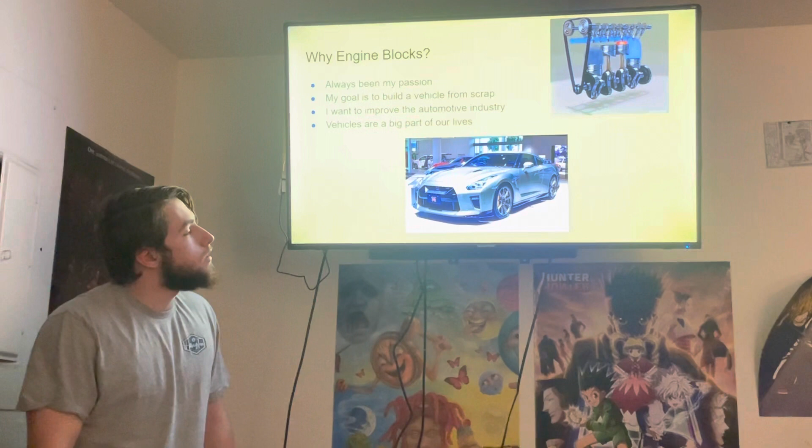So to begin with, why engine blocks? It's always been one of my passions. Ever since I was little, I've always loved vehicles. This is one of my dream cars, a GTR 35, it's a Nissan.

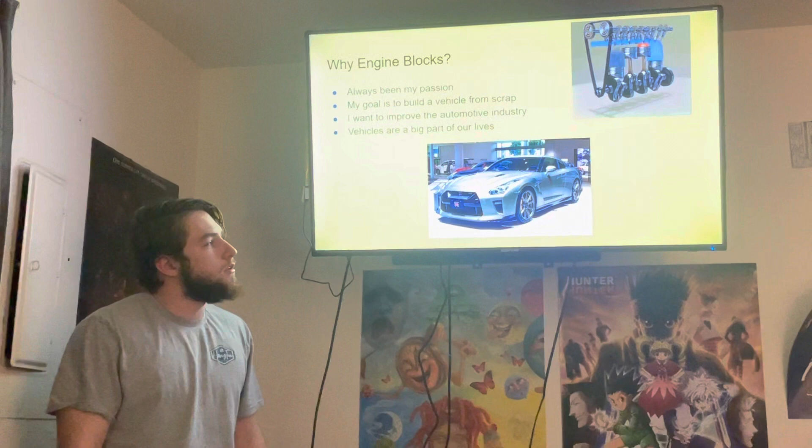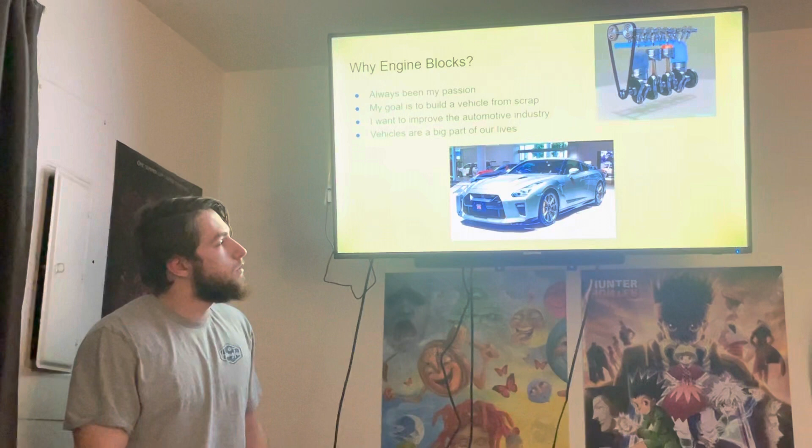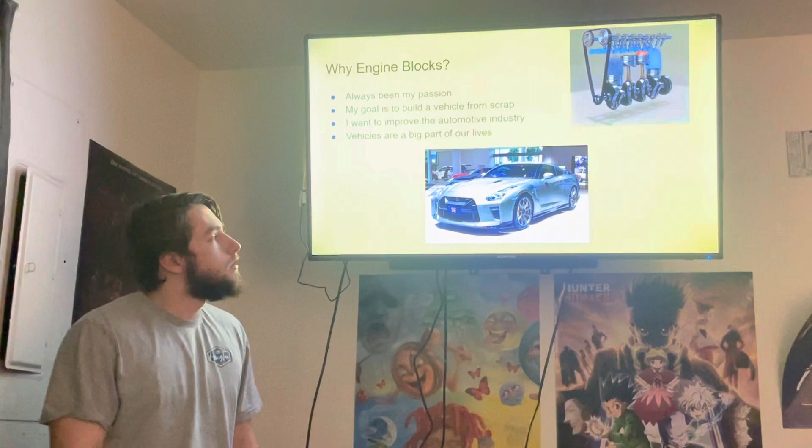Growing up, I didn't really have anyone to teach me about vehicles. So when I went into high school, that's when my interest started increasing a lot. We got to rebuild engines and diagnose problems and stuff, it was pretty cool. My goal is to build a vehicle from scrap. I want to be able to design the frame myself and build it, even the body panels, even the engine and stuff like that. It's one of my goals.

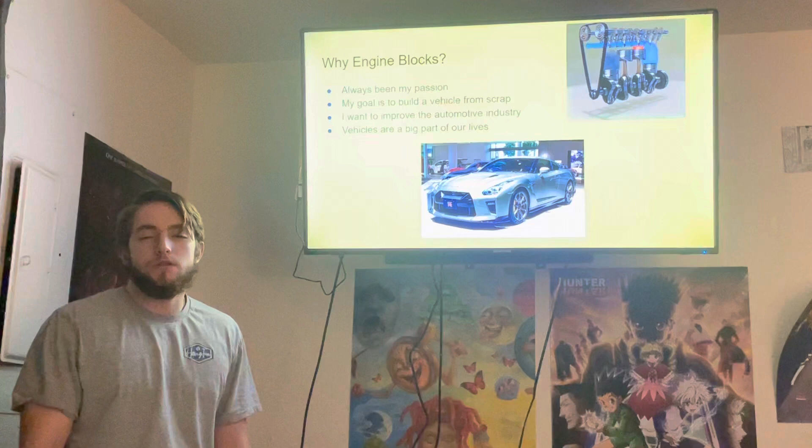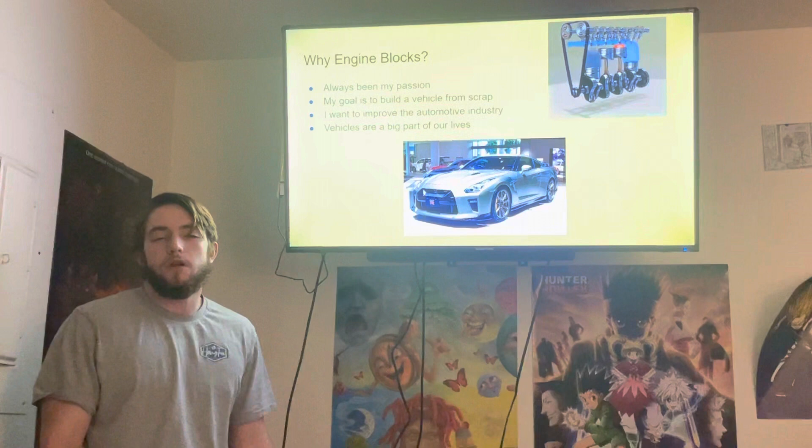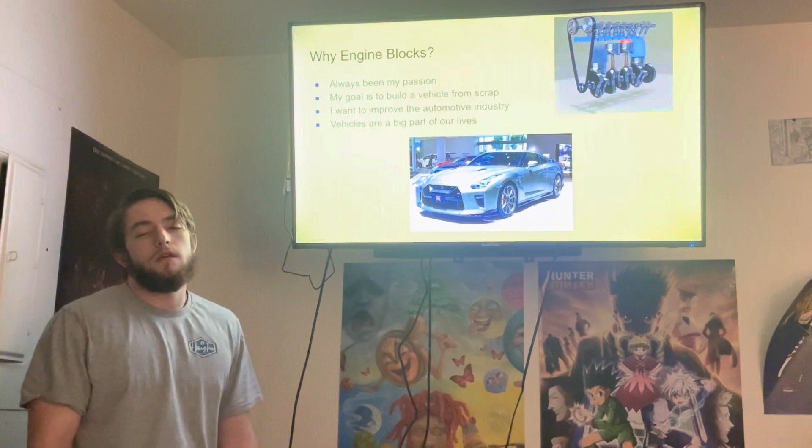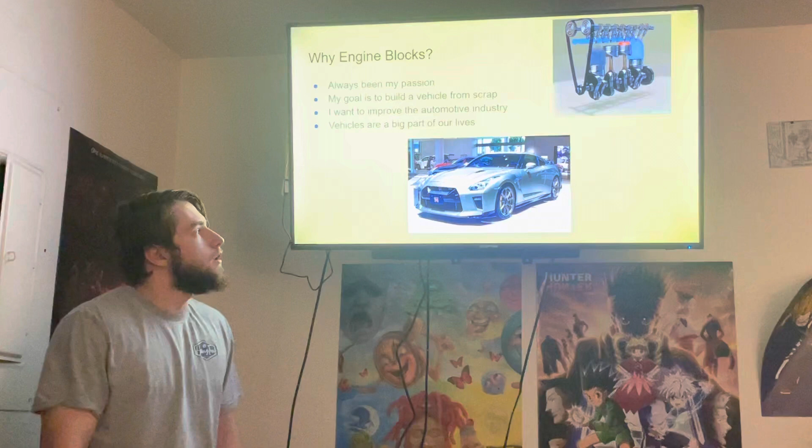I want to be able to improve the automotive industry. What I mean by that is I've been introduced to a lot of different concepts that were just concepts, they're not even a thing. But they're interesting concepts, because if you think about it, the efficiency of an engine right now is only about 20%. All the rest of the energy produced from the chemical reaction is actually lost due to thermal energy, exhaust gas expansion, friction, and all that. So I want to be able to improve that. Vehicles are a big part of everyone's life, we all use them, we need them to get around.

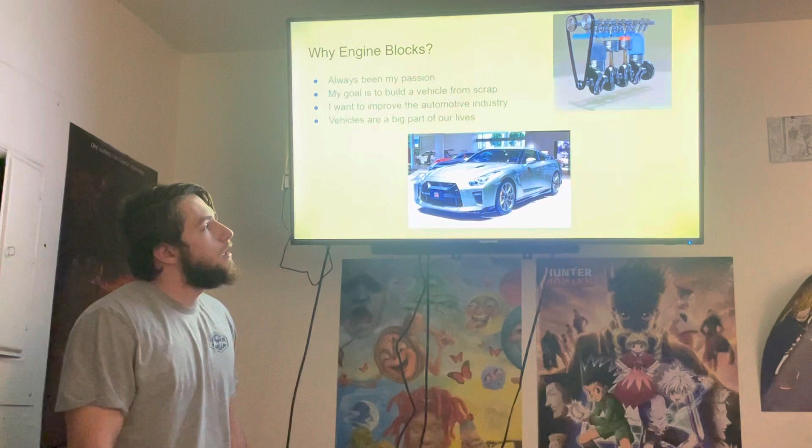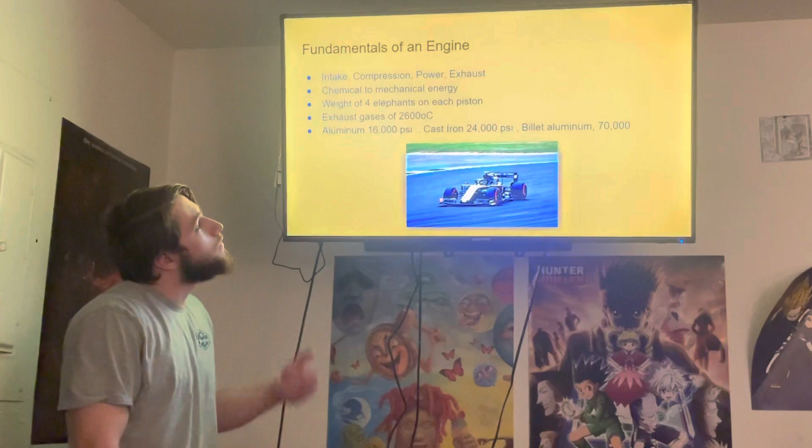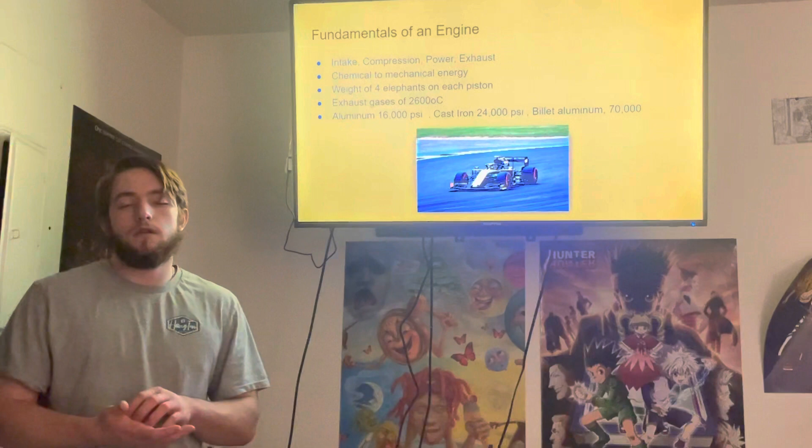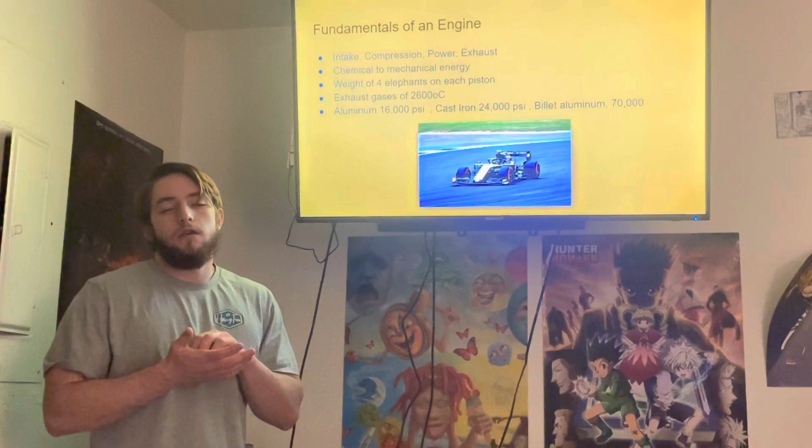So to begin with, what are the fundamentals of an engine? You have four different strokes in a cycle. First one is intake, that's when the air and fuel mixture is introduced into the cylinder, and the piston is slowly moving down at that point. Compression is when the piston is moving back up, pushing the intake mixture and compressing it. The power is when that mixture is already compressed and it's ignited, it pushes the piston down causing the power, giving you the engine power. And the exhaust is when the piston is moving back up to push the exhaust out.

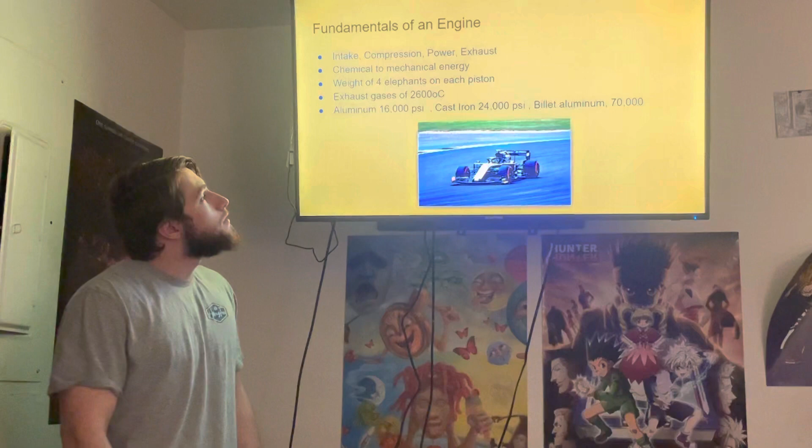The kind of reaction that happens is a chemical reaction. It's the combustion happening from the fuel burning, and it turns into mechanical energy by pushing the piston down.

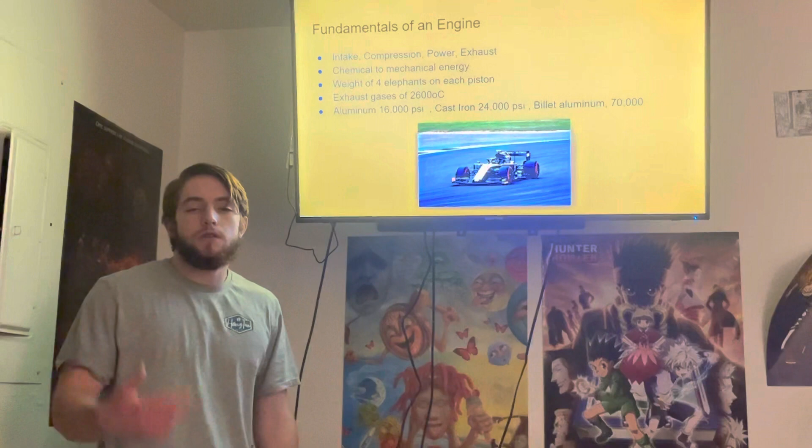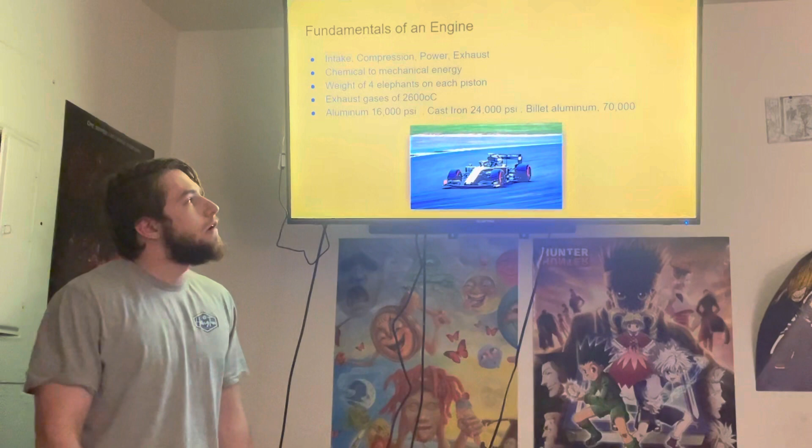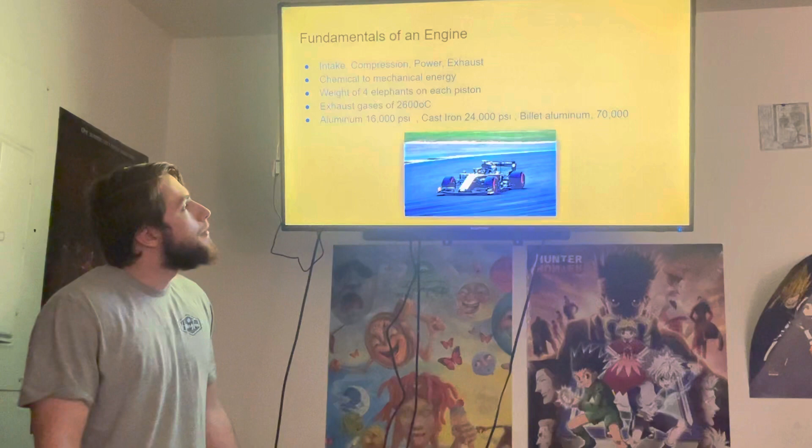The weight of four elephants on each piston, that's a statistic from an F1 car. They're obviously different because they're constantly operating at high RPMs, but it's not far off from a modern engine. They do see a lot of stress, and even the exhaust gases reach up to 2600 degrees Celsius.

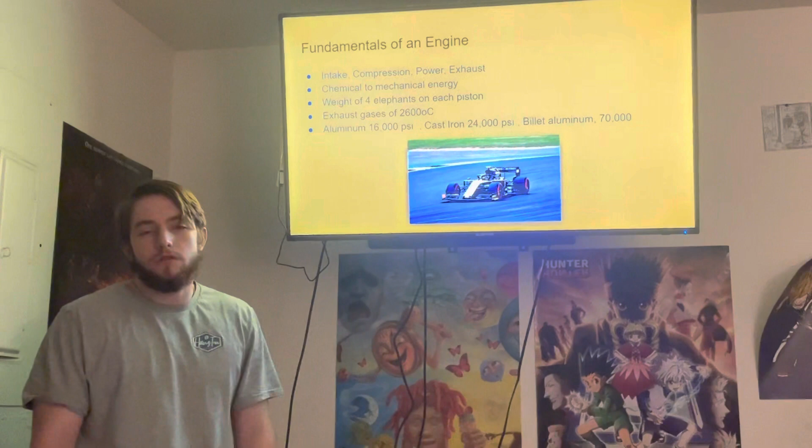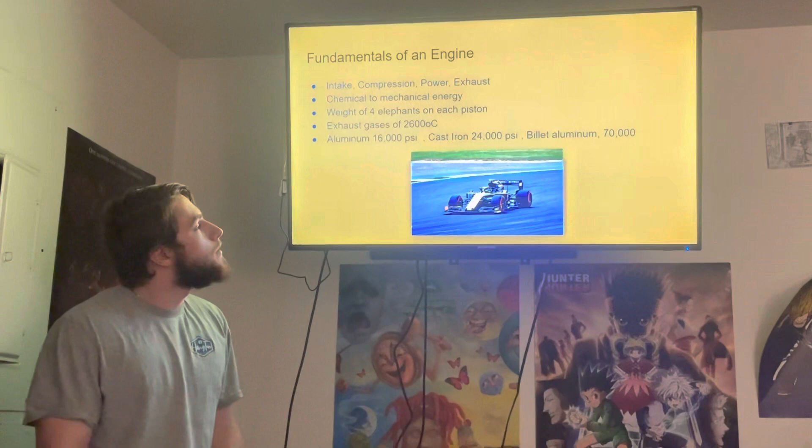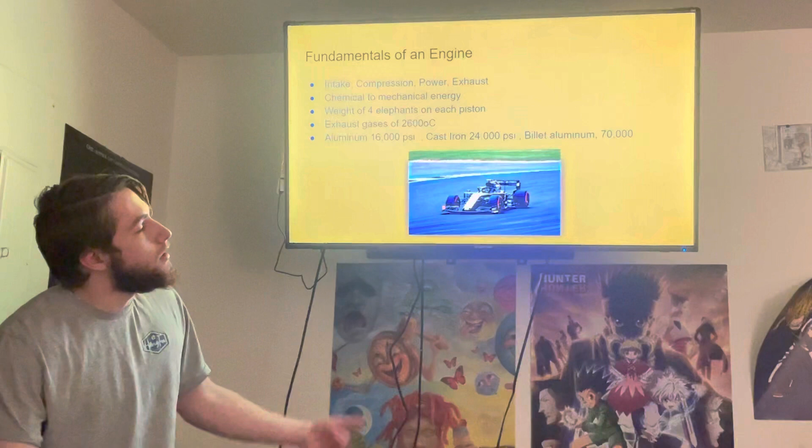These are the readings for typical engine blocks. Some aluminum engine blocks would be 16,000 psi. Cast iron can withstand up to 24,000 psi, and billet aluminum, which is a racing engine, 70,000 psi. Those are pretty high numbers. Billet blocks are usually used to get up to like 10,000 horsepower, so it's pretty crazy.

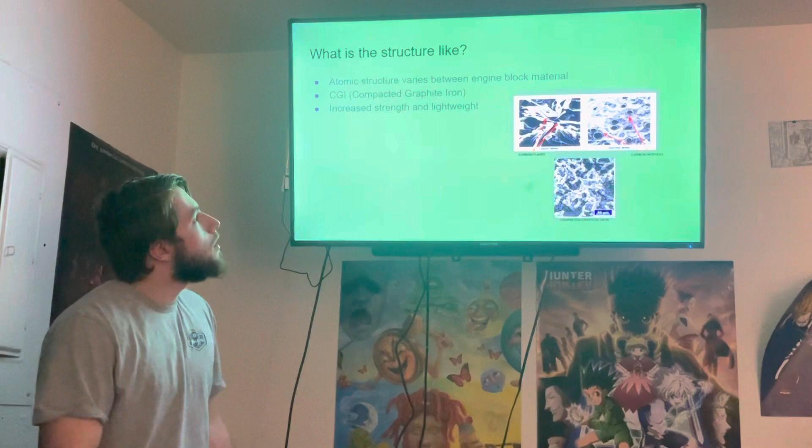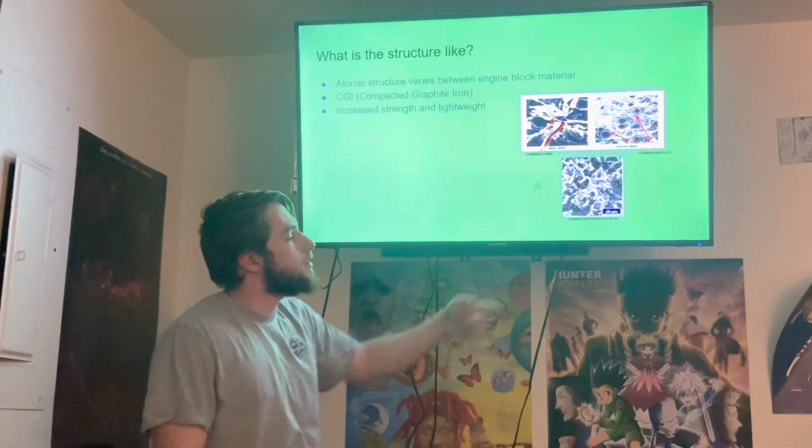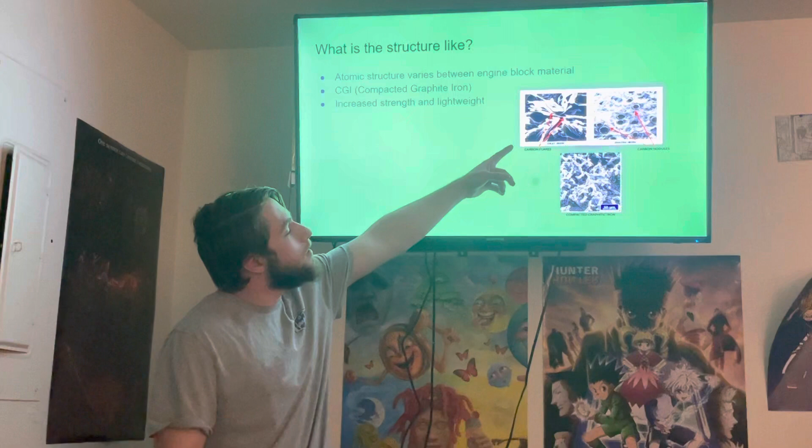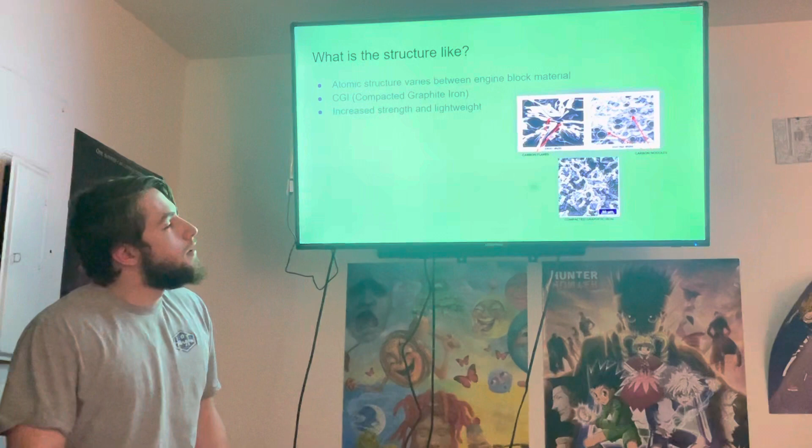So what's the structure like? Well, it obviously varies between which material you're using, but a desired structure would be like CGI, compacted graphite iron. If you look up here, this is showing you the carbon flakes, so it's just iron being introduced to carbon, small amounts of carbon. It creates a strong bond, it's very, very strong, but it's very brittle.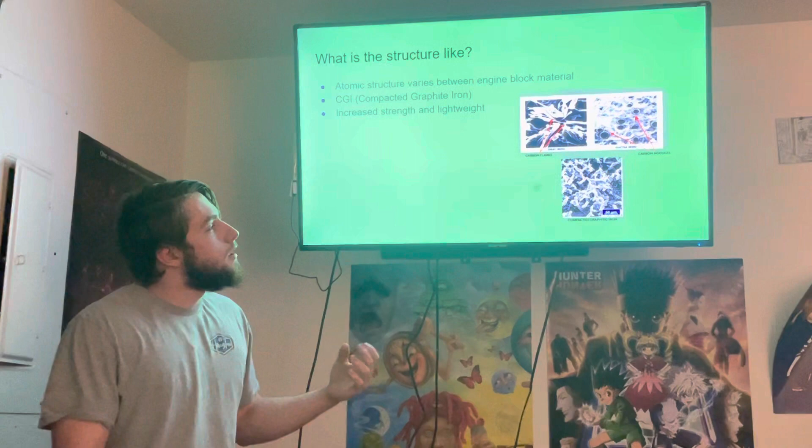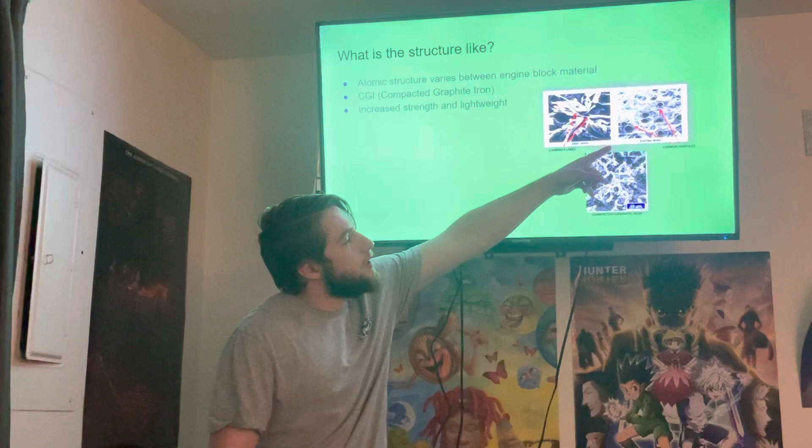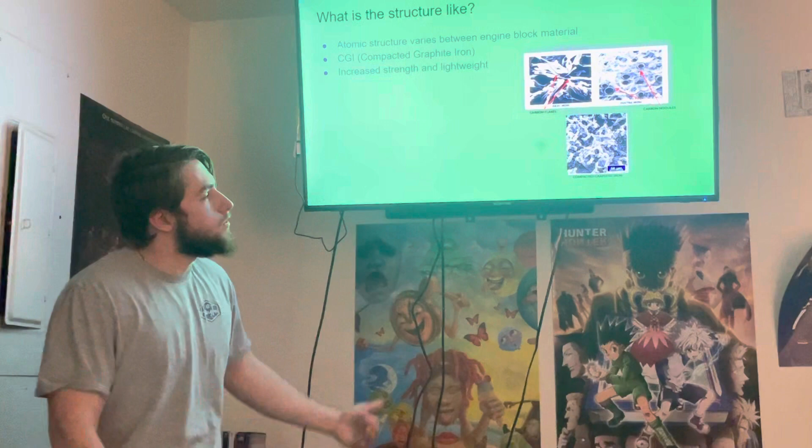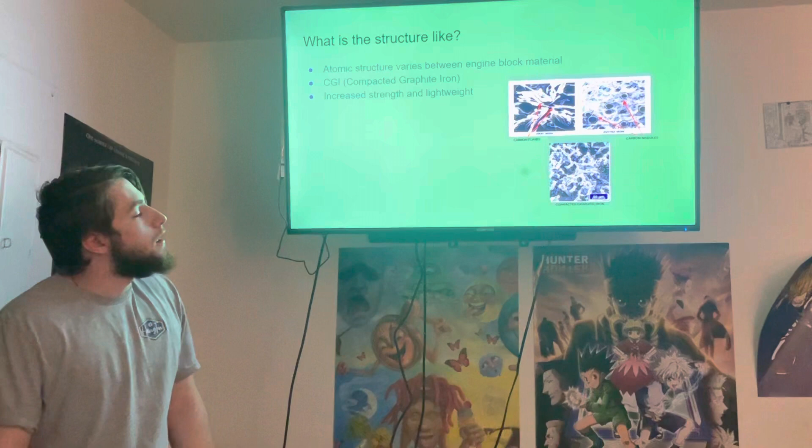It makes carbon flakes, and they're very sharp, and those sharp points are actually brittle, high stress points. Over here, what they did is they added magnesium to it, and it actually made the sharp points more like a blob, the flakes were kind of like a blob. So it improved that brittleness, it took away the brittleness, but it also took away the strength, it was not as strong as the other one. So they kind of met in the middle, and they found this makeup which has increased strength and is lightweight, so it's commonly used on performance engines, stuff like that.

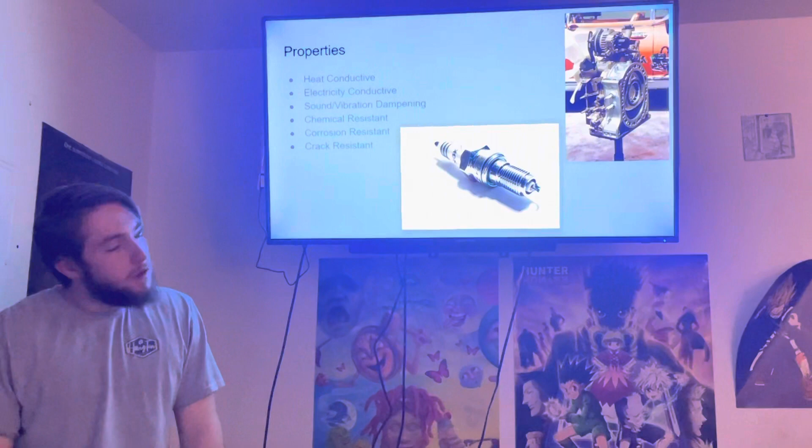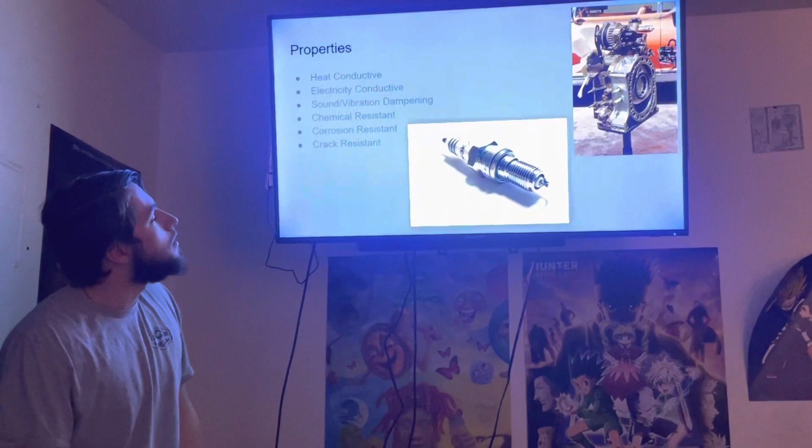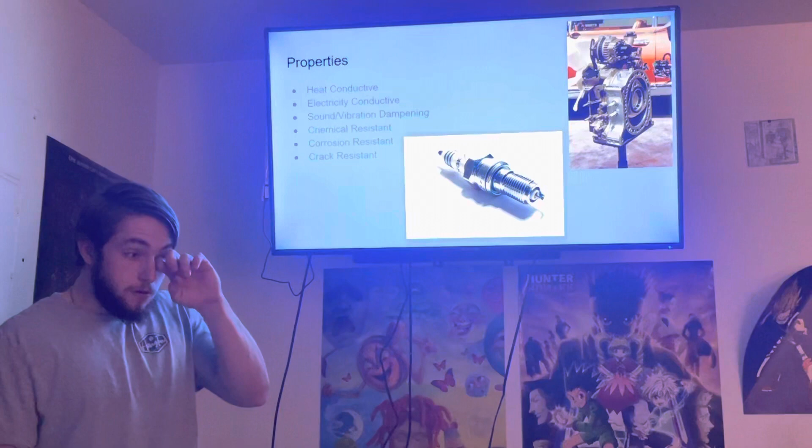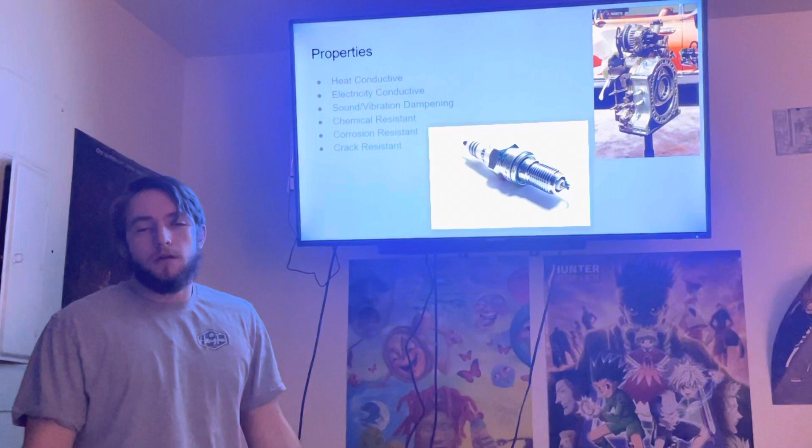So what kind of properties does an engine need? Properties would include heat conductive, electricity conductive, sound/vibration dampening, chemical resistant, corrosion resistant, crack resistant. Crack resistant and heat conductive kind of play together in a similar role, you want an engine to be able to spread out the heat. A common issue with cast iron blocks was that cast iron is pretty bad at spreading heat. Usually the heat will stay concentrated in one area and it'll increase and cause cracks and stuff like that, which is really bad, it would cause your engine to stop working properly.

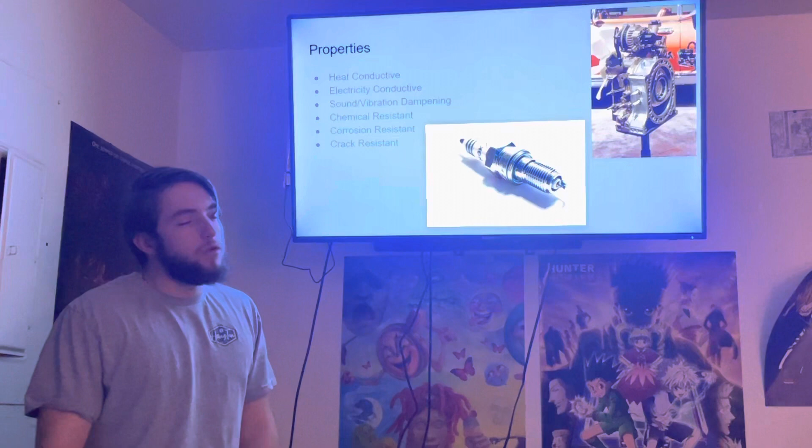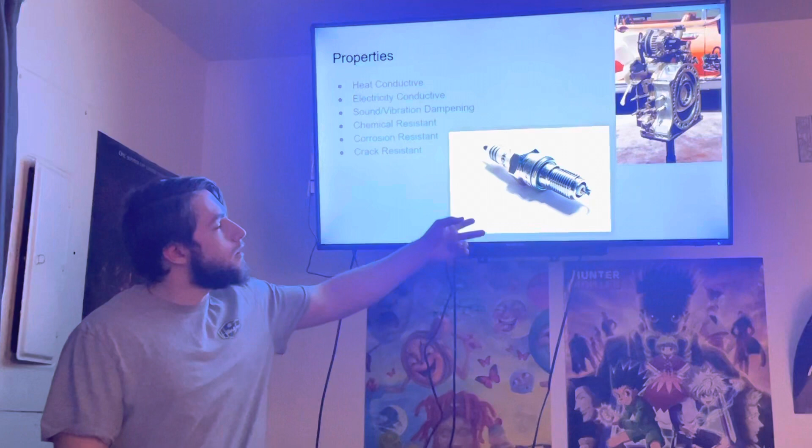And electricity conductive, obviously the newer the engine is, the more electronics it has on it, and the more need for it. Every electronic needs a ground, and quite a bit of them actually ground to the engine block itself. This right here is a spark plug, and the only way for it to work is to be grounded to the engine itself. It's responsible for igniting your fuel and air mixture, giving you that power stroke.

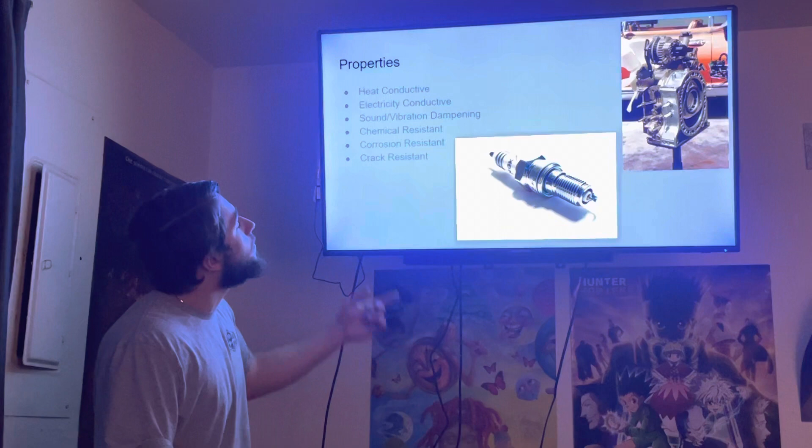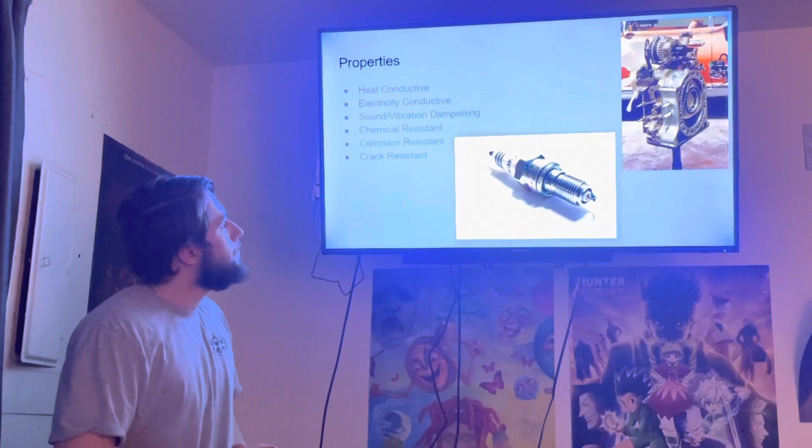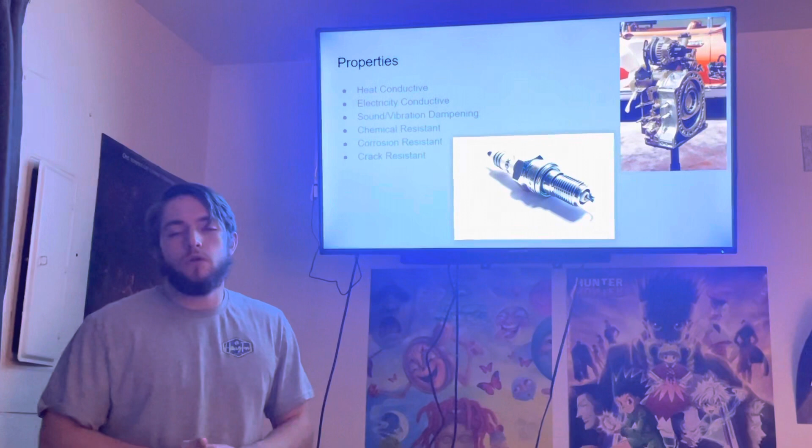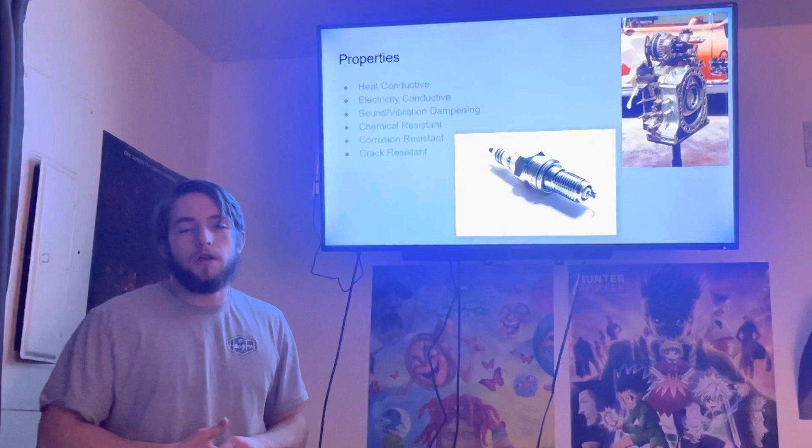Sound/vibration dampening, you can see that comparing an older vehicle with a newer one, the newer one's going to be a lot quieter. Chemical resistant and corrosion resistant, that's just relating to all the different chemicals that you put in your vehicle, such as coolant, oil, power steering fluid, transmission fluid, etc. Obviously you don't want corrosion happening in your engine block, it would slowly erode your engine block and cause more holes, and it's not something you want.